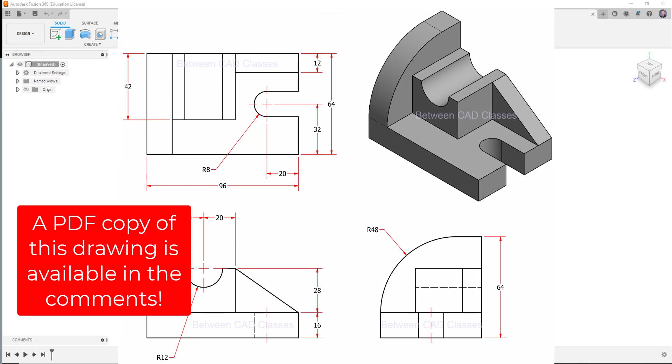In this video, we're going to take a look at the creation of a mechanical part in Autodesk Fusion 360. This is the particular part that we're going to work on, and I'm going to begin by creating the 96 by 64 millimeter base, and then I'll work from there.

So here in Fusion 360, the first thing I want to do is make sure my document settings are correct. So I will expand document settings. Currently my units are set to inches. I'm going to select the edit button and change this to millimeters for this particular exercise, then click OK.

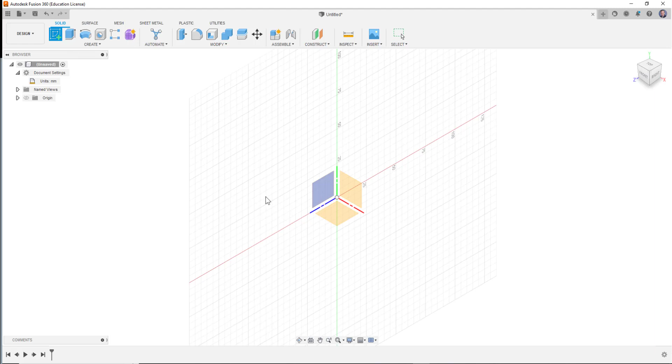The other thing I always like to make sure is to come down and select the gear here on the status bar and make sure that it is capturing the design history so I can go back and modify the part. So once again, I will begin by creating my base sketch. I'll go ahead and sketch on the horizontal plane here.

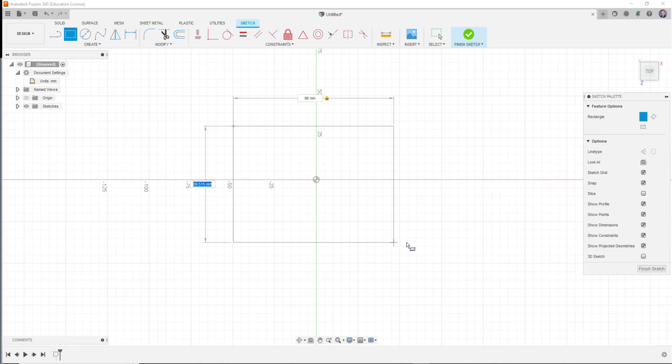And of course there's several different ways I can draw this rectangle. I can put one of the corners at the origin. I like to center my shapes about the origin, so I'll just simply start creating the rectangle. I'll put in 96 for the width. Then I will tab over and put in 64 for the depth this way.

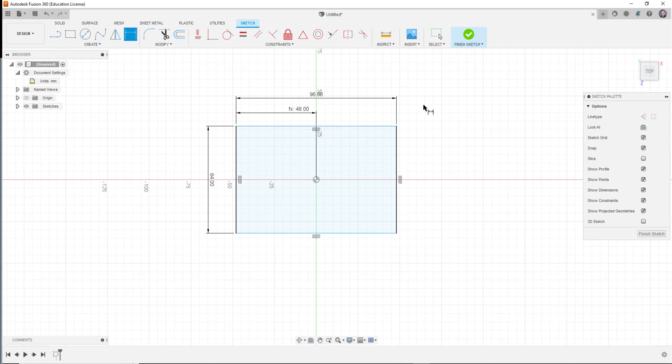Then to center it, I will add in another dimension from one of the sides to the center origin point. And then I'll simply select the overall dimension of 96 and then put in /2 so that it's always half the width. Then I'll do the same thing for the depth. I'll pick one of the horizontal lines and the origin point, click to place the dimension, then once again I'll select the 64 and put in /2.

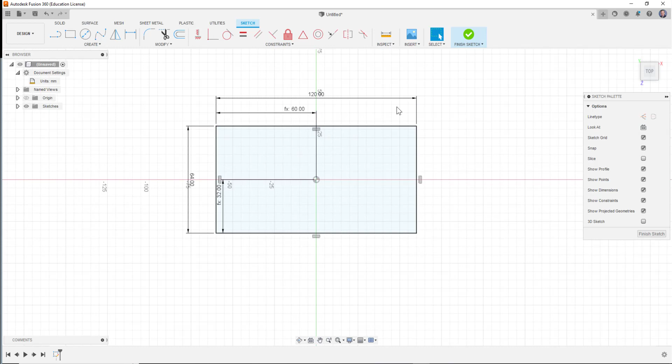Just to illustrate why I like doing that, if the part were to change and become another size, you can see that it will always stay centered since I used a formula. I'll go ahead and finish sketch, and checking my original drawing, this base has a thickness of 16 millimeters, so I'll choose my extrude command. I can manually drag the arrow up, and I can go ahead and type in 16 and click OK to create my first shape.

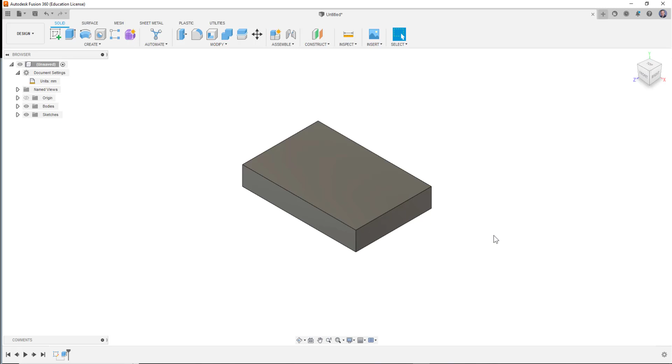This shape does have a cutout, and I could have included that cutout in my original sketch here, but I prefer to do that as a separate feature. That makes it a lot easier to go back and edit or even delete if I decide I want to do that. So I will begin a new sketch on the top of this surface. As you can see, it flipped my screen around, so I'll just use the arrows on my view cube to reorient that.

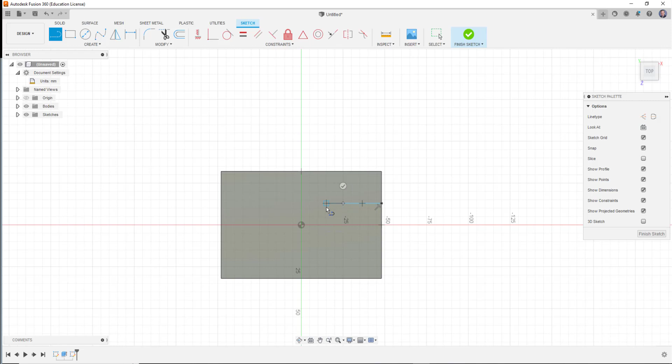And I'm just going to use my line command, and I'll start with a horizontal line. Then I will click and drag off of that endpoint to create a tangent arc. I'll bring it down and then draw back to the right side here. Then I'll come back and add my dimensions. So checking my original drawing here, this has a radius of 8, so I'll place the dimension there. The cut is centered on the part.

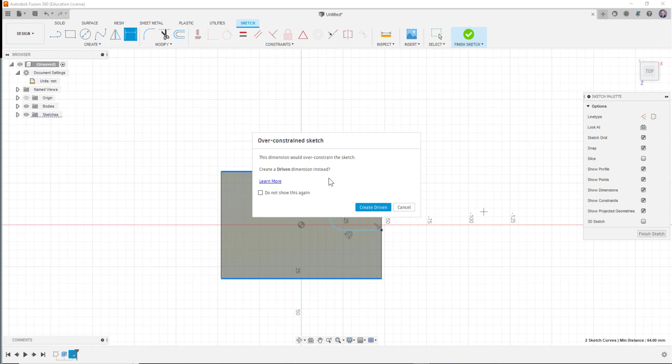So one of the ways I like to do this is by setting up a driven dimension first. So I will dimension the depth of this part, and it's going to tell me that it would over constrain this, but I can create a driven dimension instead. I'm going to go ahead and accept that. So that just means that this is a dimension that cannot be used to modify the part.

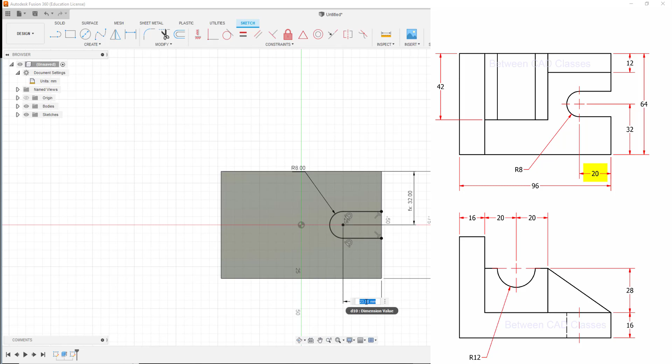But I like to get that on screen because that then allows me to place the dimension to the center of this cut. And once again, I can click on the depth dimension and divide that by 2. Then it looks like I just need to locate the center of this 20 millimeters off of the right side. And now I have my sketch, so I'll go ahead and finish.

Switch back to the home view, extrude this, and I'll just bring it down through the part. I could accept it just like this. I'm going to go ahead and change my extent type to through all, and then click OK. Next I'm going to work on the back feature.

So I'll pull up my drawing here, and you can see that this back feature has a total height of 64. So subtracting the base height of 16, that's going to give me 48 millimeters. And you can see that it's going to have a rounded edge with a radius of 48. I could either include that in my original sketch, or I could do that with the fillet command. I'm going to opt to do that with the fillet command.

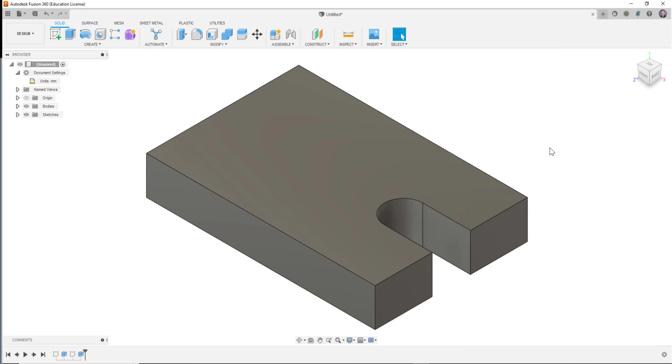So back here in Fusion then, I am going to rotate around and sketch on this back surface here. Then I will create a rectangular shape coming off of it. I'm going to use my collinear constraint to make the side of the base collinear with the side of the sketch there. And then I'm going to add in that dimension. Once again, I can either put in that dimension of 48, or since my original drawing gave me the dimension to the very bottom of the base, I can do that as well.

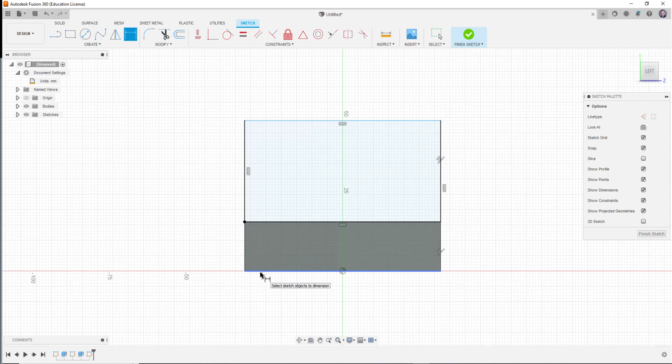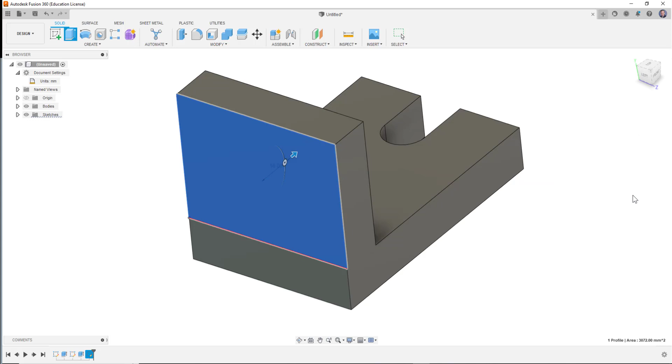Then I can finish that one and extrude. So it's going to go back into the part, checking my original sketch, a thickness of 16. So that would be negative 16 based on the direction of my sketch here. Then I can come in with the fillet command and select the edge and set the radius to 48. That way I didn't have to actually do that in the sketch mode.

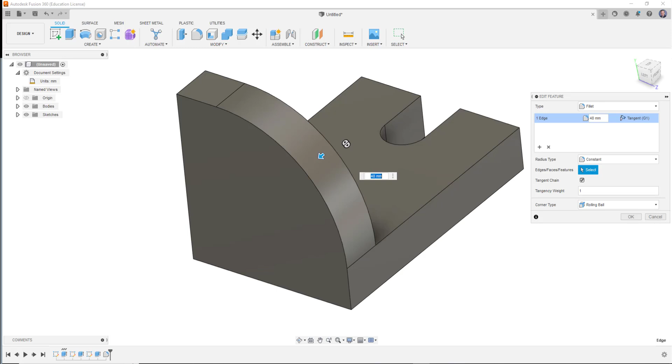Again, one of the advantages of this is it makes it a little bit easier if I want to go and edit the fillet. I've got it down here in my history, and I can right click and edit it if I want to make a change to that value. Alright, so a couple more features here. I'll rotate around to this side of the part, and I'm going to start by creating the rectangular extrusion, and then I'm going to make the semicircle cutout a separate feature.

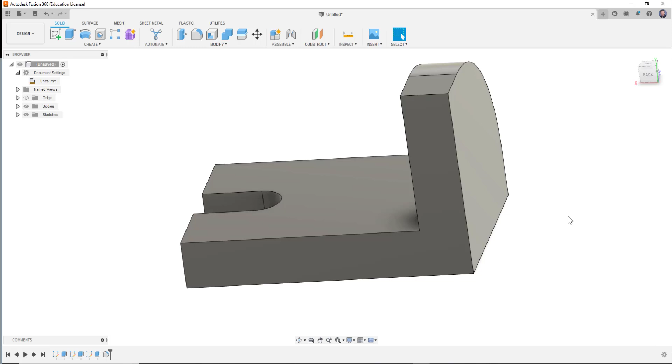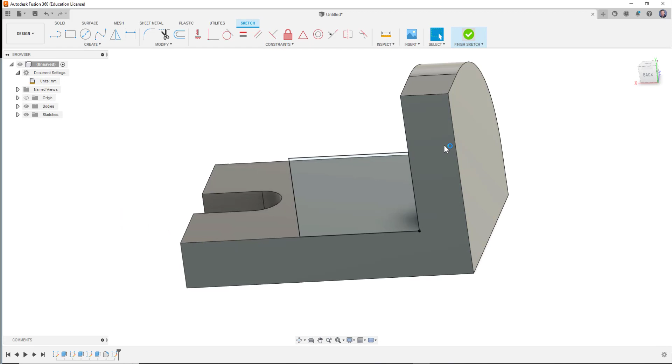So, looking at the detailed drawing here, I can see that this feature is going to be 40 millimeters wide by 28 millimeters tall. And looking at the top view, I can see that it's going to be a depth of 42. So once again, back here in Fusion, I will create a sketch on the surface here. I will create a rectangle that starts at that corner, and the width was going to be 40. Then I'll tab to my height. And the height was 28. And then I'll go ahead and finish my sketch and extrude that a distance of negative 42 into the part.

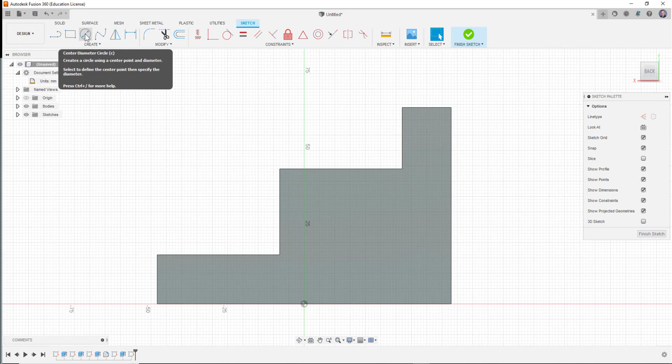Again, I could have included that circular cutout, but I find it easier to do it as a separate feature, and more importantly, easier to go back and edit later or delete if I want to. So I'm going to sketch on this surface once again. So once again, we'll pull up the original drawing here, and I can see that the semicircle shape has a radius of 12 or a diameter of 24. So back here in Fusion, I will create a center diameter circle at the midpoint of this top line, and I will give it a diameter of 24.

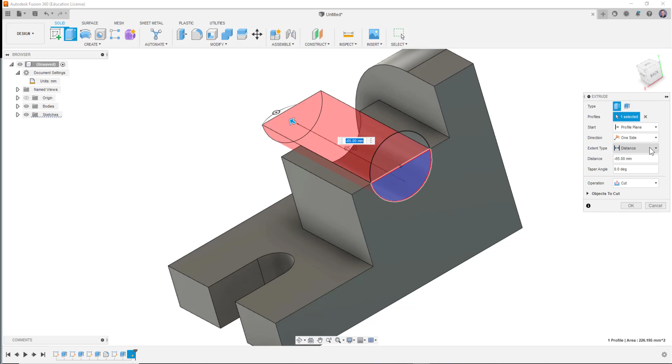Now I could go ahead and use my trim command and trim up the top half of that, but it's not actually necessary. If I go ahead and finish and use my extrude tool, you can see that I'm able to just pick that bottom half, and then I can go ahead and cut it all the way through the part. Once again, I usually prefer to change my extent type to all when doing this. And then I can click OK.

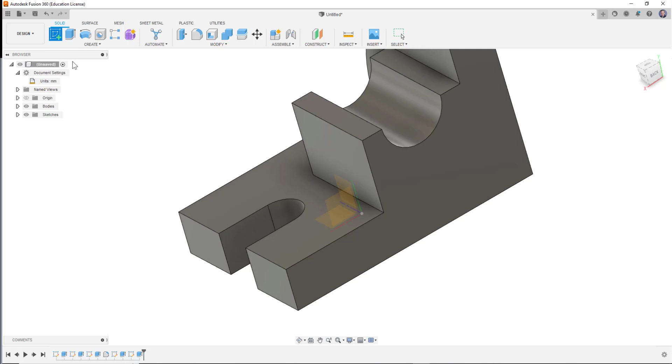Now I've got one feature left, pretty easy to do from here. Again, checking our original drawing, I can see that this triangular feature is going to be extruded at a depth of 12. So back in Fusion, I will do one more sketch on this surface, and very simply draw a line to connect the two endpoints. Then finish it, and then extrude, and again this one is going to be a depth of negative 12. And then I'll select my home button, and there I can see my completed part. That concludes this Fusion 360 tutorial.